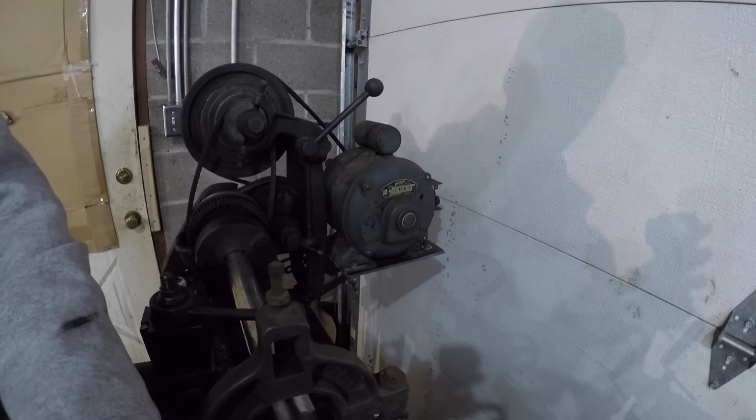This video is going to be on replacing the motor out of this Atlas lathe. That's the new motor I have mounted up. I'm going to go through the steps of how I figured out the math to the right pulley size, speeds, feeds, and what's not, and also show you the old motor that I took off and the basics behind how to change that out and get it going where you want it. So that's what we're going to cover today. Hope you guys like it.

In upcoming videos, we got our new project coming, the chainsaw mill. I'll be mounting a 4-stroke motor up to a frame, and this is going to be beneath it. I've got to machine some parts to mount this up, but all in all, we're hoping to have a 60-inch chainsaw mill with some homemade bushings and things to get it all working right. So yeah, that's what's coming up, that's what's on the agenda.

I got the lathe running, got the tailstock rebuilt, I have a video on that, also mounting up this new tool post, and just some general stuff about the lathe. But now that that's all taken care of, we can get into the real fun project. So hope you guys tune into that and enjoy it.

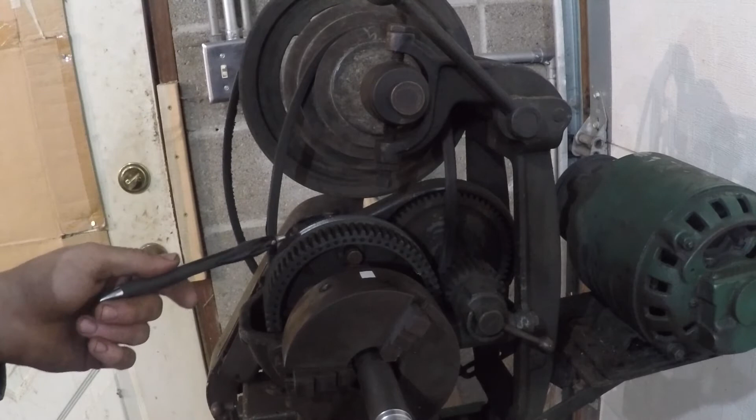My plan is to replace this old motor that died. It started losing power, slowing down, and I could play around with changing the brushes or whatever, but this motor is super old. The insulation on the wiring was cracking, and it's seen better days. So I got a couple other motors laying around, hopefully I can find one that will fit. But first I got to do a little bit of math, and I figured I'd show that because it might help people that are trying to figure out what speed for their lathe and whatnot, and surface feet versus the actual motor itself. Alright, let's go over and get started.

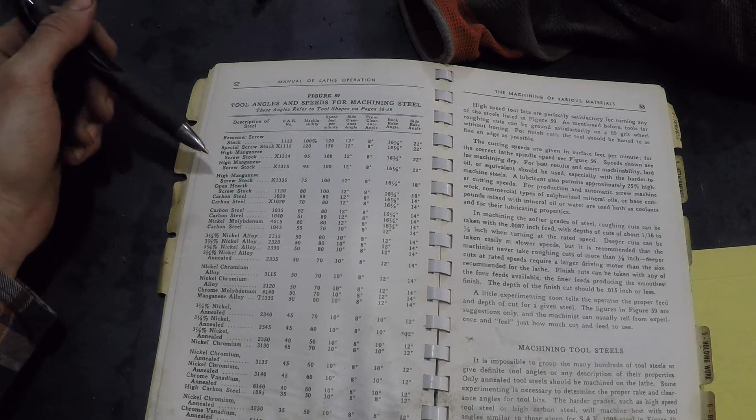Tool angles and speeds, which is pretty cool. Just regular carbon steel, 1020. I'm not really planning on machining a lot of that with this lathe right now, but anyway, carbon steel is probably more between 80 and 100 surface feet per minute.

So we'll say 100 just to make the math easier. Say we got a 1-inch diameter rod, and then pi times diameter is your circumference. So pi times diameter equals circumference: 1-inch diameter times pi, 3.1415, that's the circumference.

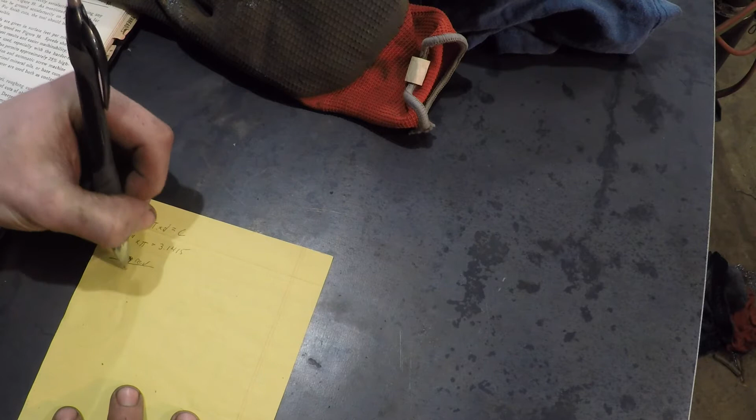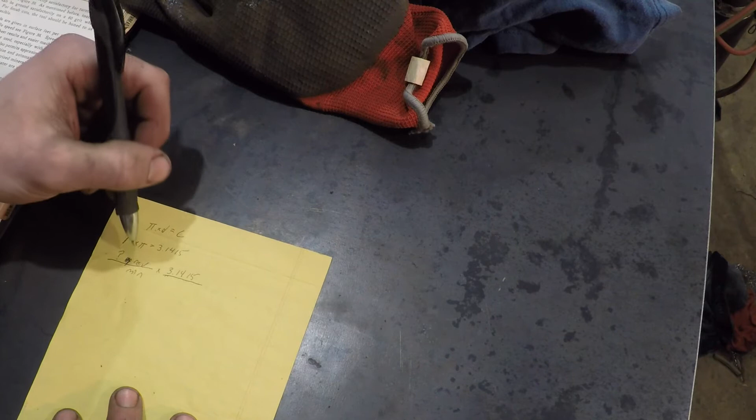Then we need to figure out what RPM, revolutions per minute, times that diameter, because this is each revolution. So 3.1415 - that's your circumference times your revolutions per minute, which will give you how many inches. We're in inches right now, inches per minute that it's spinning past that thing.

So if we're going to run, and we want this to equal 100 feet per minute - 100 feet per minute would be 1,200 inches per minute. So 1,200 inches per minute divided by 3.1415, we divided it by that, so now we are at 381.9 revolutions per minute, which will equal our target.

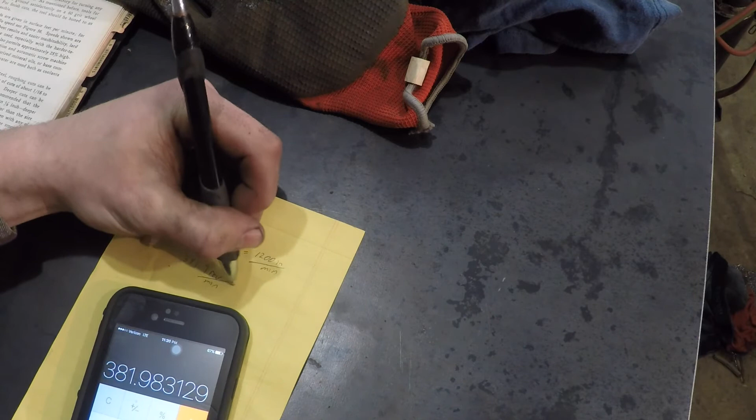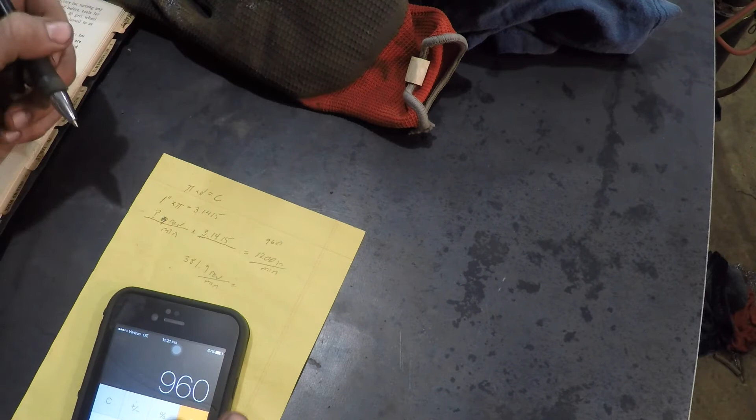So we need 381, and then for 80 feet per minute it would be 80 times 12, which would be 960, divided by 3.1415 - so 305 for... wait, 305.5 equals 80 feet per minute, versus 381 for 100 feet per minute. So we want that spindle spinning about

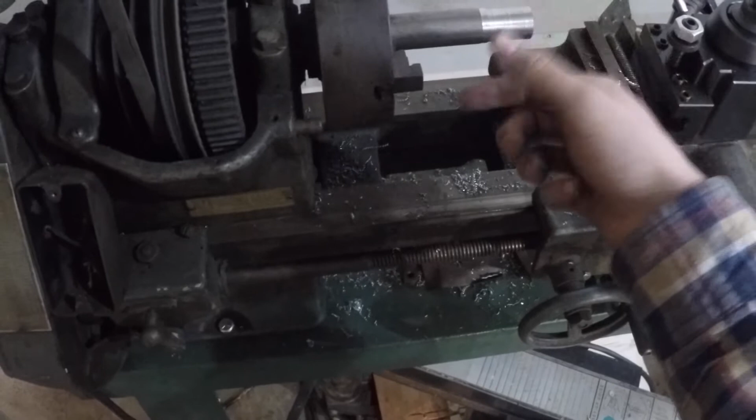300 to 400 RPM, and we're going to set it up so we've got 4 options here, so we're going to pick one of the middle options. That way we have some adjustability here, and we can go all the way up. As you increase that diameter, it's going to be spinning slower - well, if you have the same speed and increase the diameter, it will be spinning faster, but for an increased diameter you need to slow the spindle speed down.

So for 1 inch - I might be doing a little bit smaller than 1 inch, but I don't think I'll be milling a lot of stuff under 1 inch - so I'm going to set that as kind of the faster speed. If we were over here in this belt selection, for a faster speed we have a bigger pulley spinning a smaller one, so this would be a little bit faster.

So I'm going to set this up so 1 inch will run nicely at this speed, and if I need to, I can jump to this guy and increase the speed a little more, but I still have 2 selections for bigger material to slow things down. So I think that's kind of my plan.

We're going to measure these and see the ratio between them, and then pick a speed, hopefully I can find a motor that'll be spinning just about right. So let me grab a tape measure here.

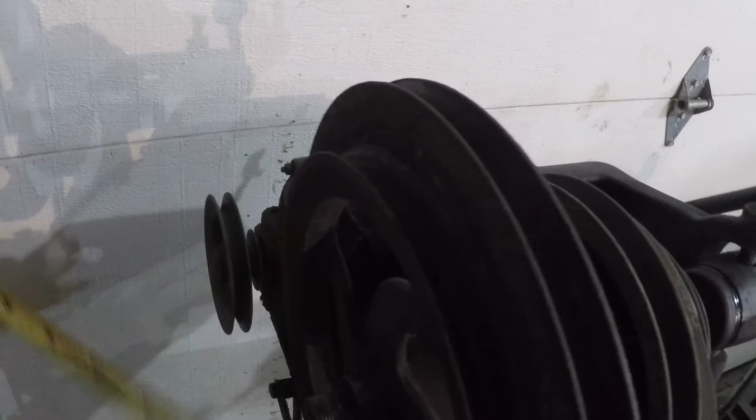Say 7.5 to about 4.5. Mark this down.

So on the motor we've got 4.5, 7.5, and then I'm going to measure the other two. And then we've got 2 inch and 9 1/4 inch.

Again, it's not going to be perfect, but this will get us in the ballpark. So we know this will be our faster speed here because it's jumping from a bigger one to almost slightly larger. This is a much larger gap, so this will be spinning a lot slower. So we're going to pick the faster speed that we're going to be running at, because this 1 inch is pretty small.

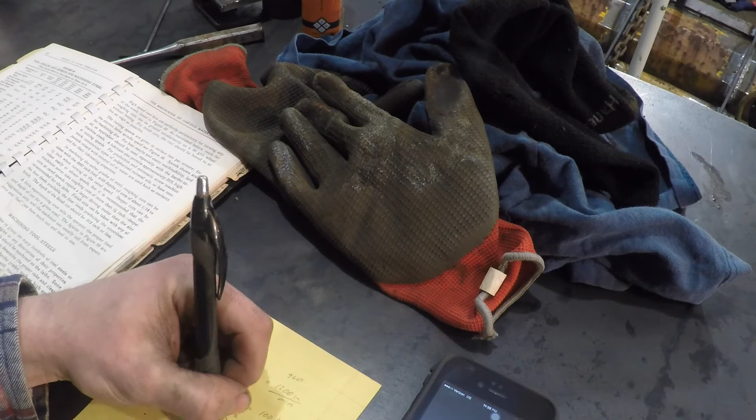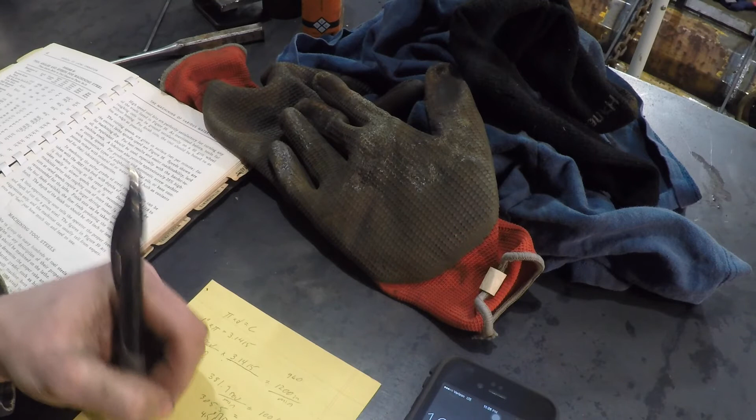So 9.25 divided by 2 is 4.625, that's the ratio on the first pulley. And then 7.5 divided by 4.5 equals 1.6 ratio.

Whatever speed you're having here is going to get stepped down once, and then after that, the same shaft will always spin at the same RPM, but your pulley size, so jumping from here to here doesn't matter. Your shaft's still spinning at the same speed, but as you go from here to here, there's going to be another speed change.

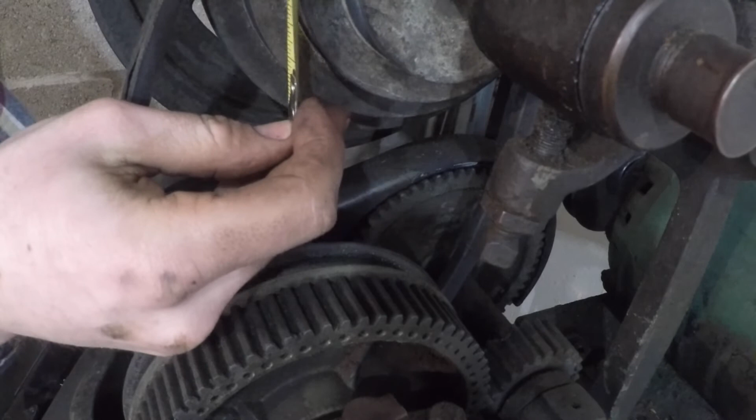So, and on these guys we've got a 3 inch, a 4, a 5, and a 6.

I'm going to assume these are the same, they look about the same. I can't really measure it, but I'm going to assume. I think they're about the same. That looks like a 6 inch, yeah, that looks like about 6. So we have a 3, 4, 5, 6.

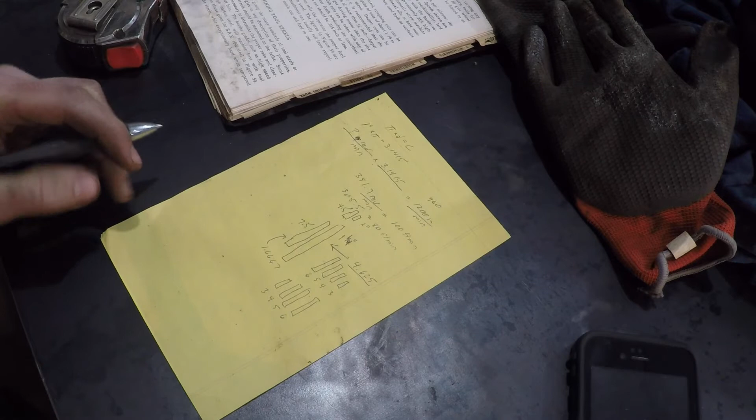So we get a little bit of a variable ratio there, that gives you a lot more speed control. After that we have 3, 4, 5, 6, and then on the bottom we have a 3, 4, 5, and 6. I guess for the drawing aspect, we'll put those all on a shaft together.

I know my handwriting's pretty shitty.

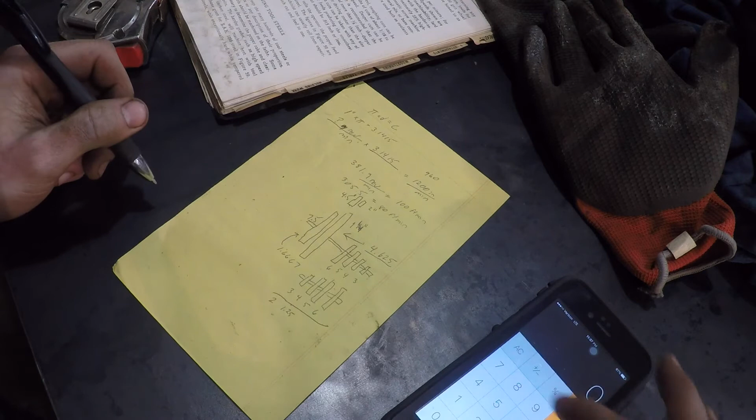So 6 divided by 3, we have a ratio of 2. 5 divided by 4 is 1.25. 4 divided by 5 is 0.8. And 3 divided by 6 is 0.5.

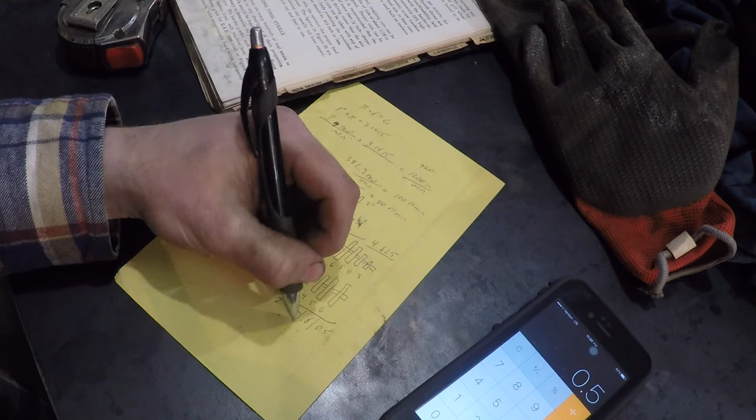So, in the position we're at, we are. So I got some junk, that's a radial arm saw and a wood lathe, they're going out of here. When I unloaded all these new tools, those have been in there, so those will be gone soon.

So we're going to be at the second position for 1-inch stock, like for our approximation that we're doing now. And hopefully this motor's in the ballpark, we might have to change some things, but this is just to figure out the right RPM of the motor, because that's the unknown at the moment.

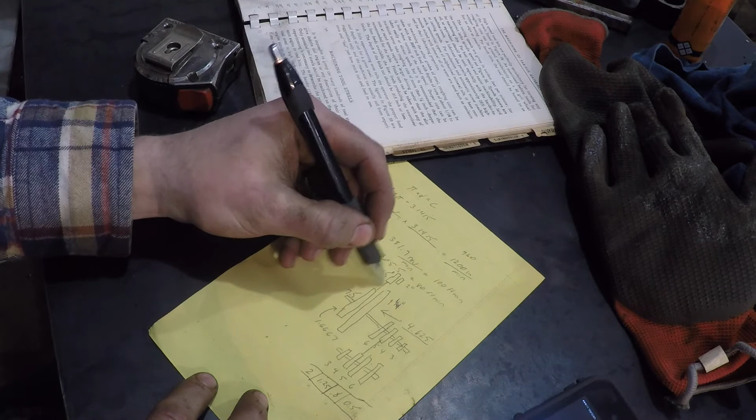So if we're in the second position, that means we are right here, and we're going to say that we are on the faster side here too. So whatever RPM of the motor, say it's, I think the motor I have is 1725 RPM, it's going to go through a 1.6 reduction. So that's that first one here, because we're on this guy, so a 1.6 reduction.

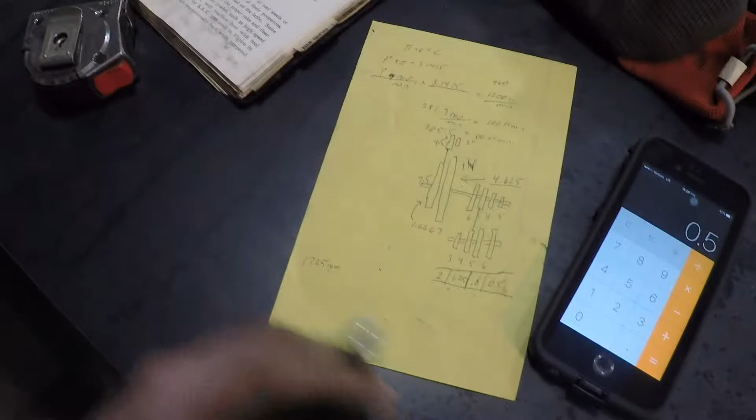So divided by 1.666. And then after this, it's going to be on the same shaft here, going from 5 to 4, so it will go from a larger pulley to a smaller pulley, so it'll go up by 1.25, so times by 1.25.

I might make an Excel with this in it, and then I could just easily throw in different values for the different options and run through this. I might do that later tonight, that way I can double check that my speed ranges are useful for multiple sizes of material.

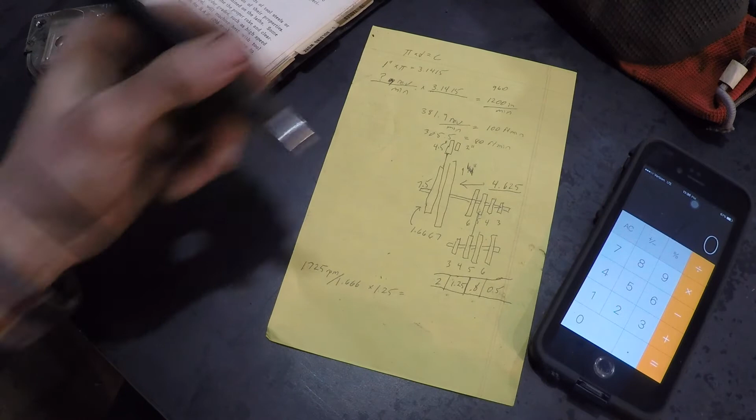But for the sake of having to do all the calculations, I'm going to ballpark it with this for now. So 1725 divided by 1.666 is 1,000, times 1.25. Because we're going to divide, wait, 1725 divided by 1.6666, yeah, so we get slower as we go from here to here, which makes sense. And then we should speed up slightly because we're going from a larger pulley to a smaller pulley, so times 1.25, so that equals 1,300.

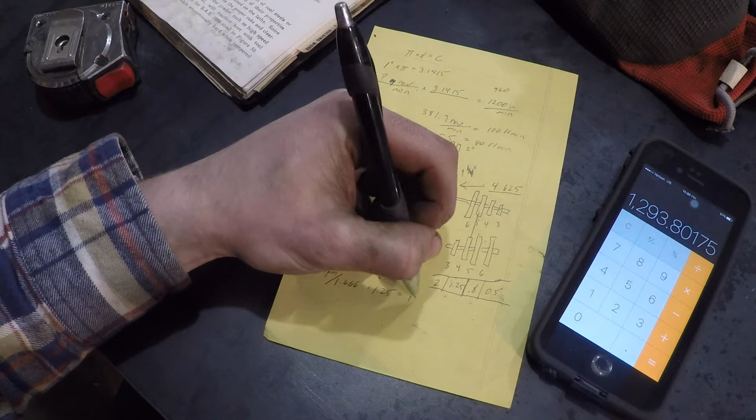1,300 RPM. And remember, our goal for a 1-inch piece at 100 feet per minute was 380, or for 80 it was 305. So we're kind of hauling ass. We're 3 times too fast.

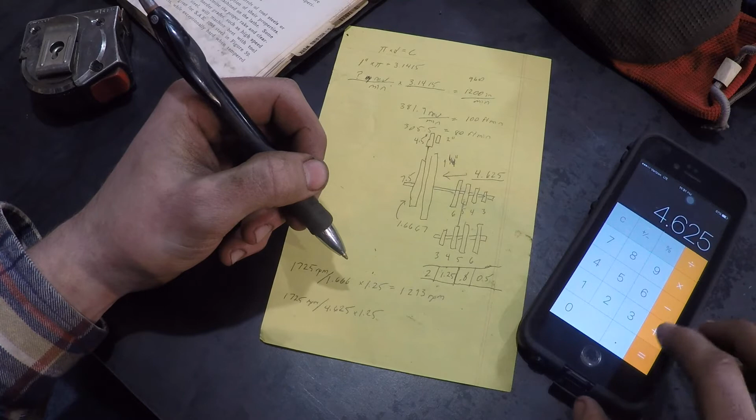Let's do one. Say we put it on the other one, the 2-inch to the 9 1/4, so 4.625. So 1725 RPM divided by 4.625, and then we're going to multiply again by 1.25. So 1725 divided by 4.625 is 372, times 1.25 gets us at 466 RPM, which is a little closer to our target.

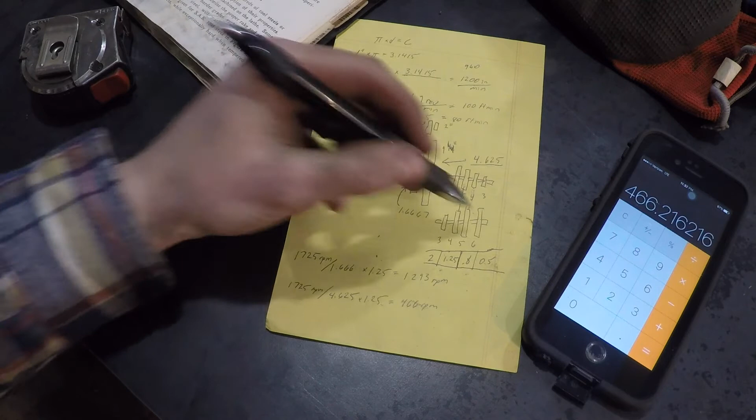And if we hop down to this ratio here, the 4 to 5 is 0.8, so then we would just substitute that in here. So 0.8 would take us to 1725 divided by 4.625, times 0.8, we're at 298.37 RPM. That right there is a little more doable, a little better in our speed range.

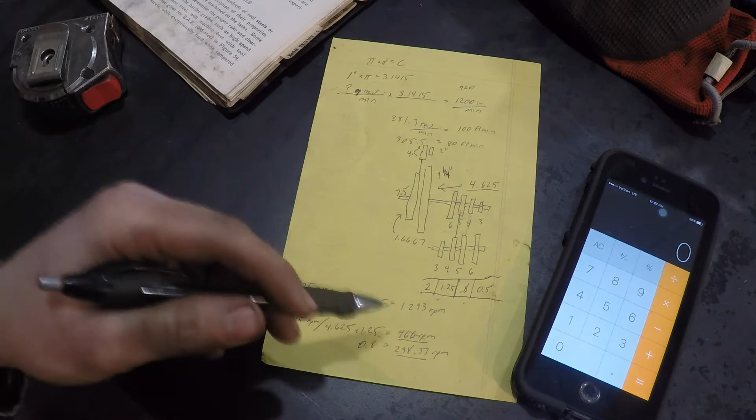So I guess let's just do this. We'll figure out if we're on this 2 to 9 1/4 pulley, we'll figure out all 4 of these and see if that's a reasonable range. Because I also have some carbide tooling. I don't know right off the top of my head what speed, but I know you can run carbide a little faster, so it might actually be okay.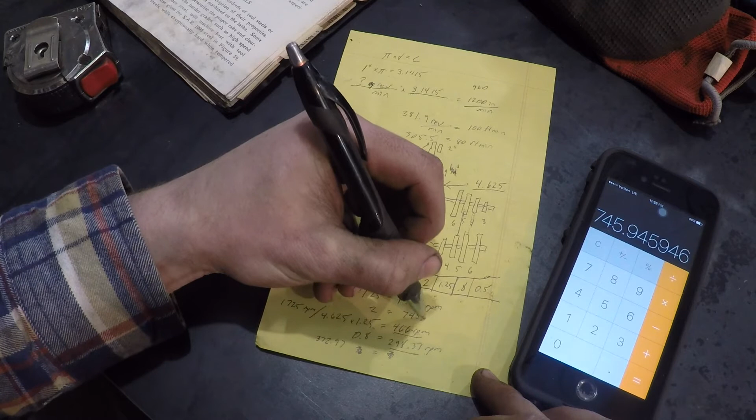So 1725 divided by 4.625, this number is going to stay 372.97. And then we're going to times that by 2 for this pulley here. 700 - I'm going to put this up here so we don't get confused - equals 745.9 RPM. And then our last ratio is 1/2, so 372.97 times 0.5 is 186.485 RPM. So for these 4 ratios here: 745, 466, 298, 186.

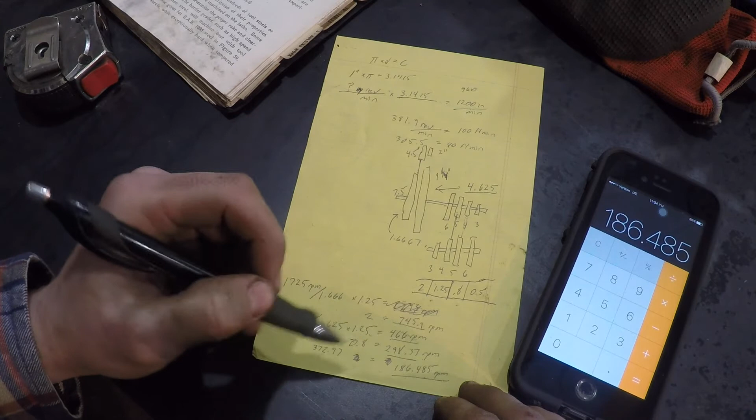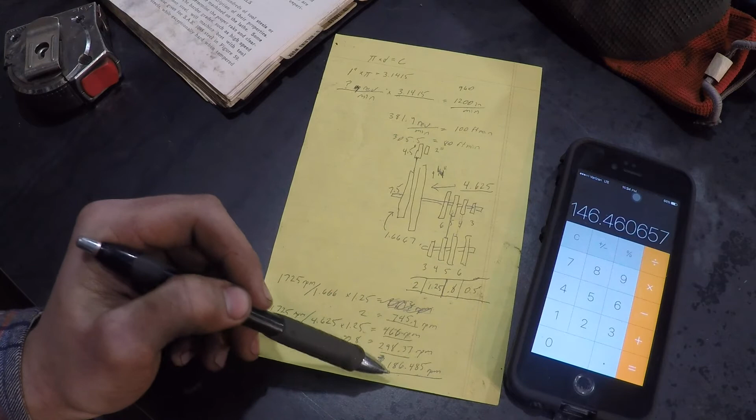That's okay for - let's see how big of a piece we could put on here and still be all right. Say we have a 3-inch piece times pi, 3.1415, so pi times diameter equals our circumference, times our RPM, say we're at the slower speed, times 186.485. That's going to be in inches per minute, divided by 12. So we're still at 146. That's a little too fast on the slowest setting for a 3-inch piece. So that would be on this setting here and on this pulley here. So our lowest we could go with a 3-inch piece would be 150 feet per minute. And you can divide by 12 in that calculation because nothing's squared.

So if you have anything squared in a calculation, you have to apply that factor twice. This stuff here is called dimensional analysis. It's useful for tons of things - pulley calculations, chemistry, lots of different things. That's where I learned it at.

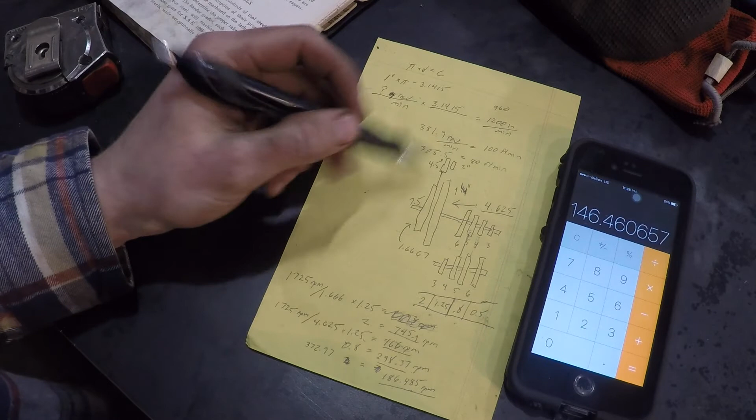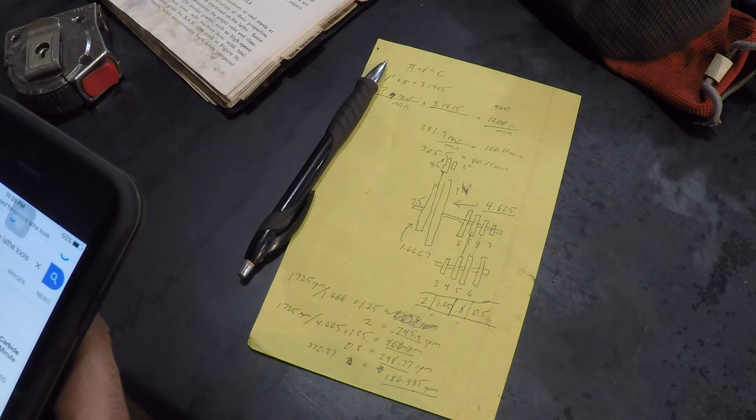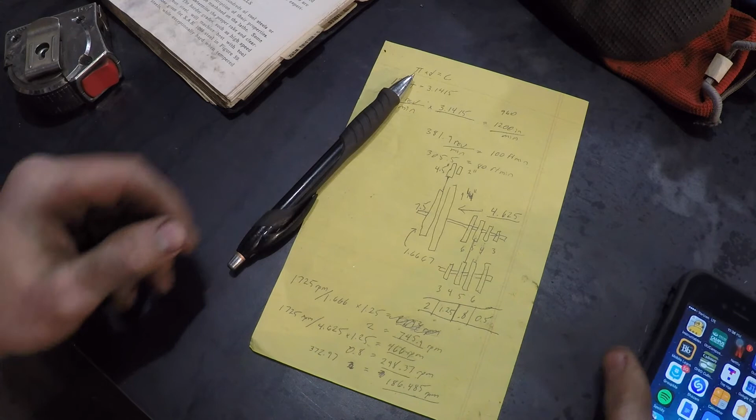So anyways, for a 3-inch piece, 146 is still a little fast. For carbide, it's probably okay. Actually, I'm going to look that up while we're sitting here. Cutting speed, carbide, lathe tools. So for free machining of plain carbon steels, that's 950 feet per minute, which is very doable on this now. It's anywhere from 600 to 1,000 it looks like, just off a little quick glance. It's probably different for specific tooling, but yeah, I think that'll be okay, because like I said, we're still running slow enough on the slowest setting.

We're at 150, which is a little bit fast for regular high-speed steel, but it should be okay - I don't know if I'm going to be doing 3-inch stuff that often anyways. So I think with this setup we'll be okay with this 1725 motor. So let's go get that motor.

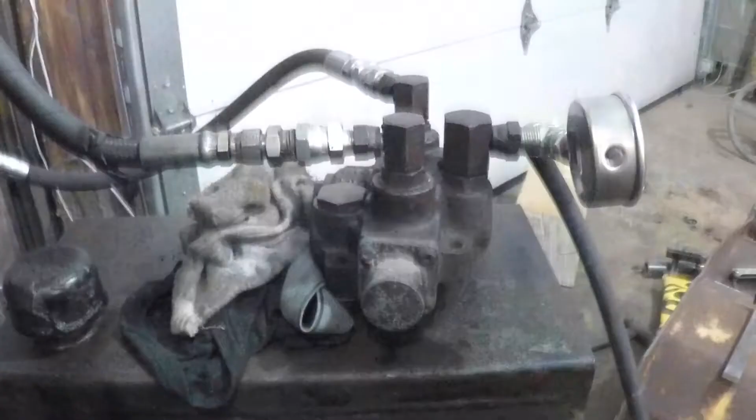So this was a project I'm working on too. I got this hydraulic pump, and I hooked it up - it's actually a dump truck reservoir and valve body - and then I fabricated this little cart here, and I was going to use it as like a little mobile hydraulic unit for the shop, for the tube bender and stuff. But that motor's a little underpowered anyways. I think it's only 3/4 horse, so I won't feel bad if I pull that motor off of there and put on something else.

So here's this little pump. This is still in the mock-up stage. This guy's not even mounted - I was just holding it with a vice grip while I was testing this out. I haven't even finished welding all this or bolting it all together. So yeah, I don't feel bad stealing this motor. I might look at another one too. So let's look at the speed on that guy.

Yeah, and I got another project here. It's a flail mower I'm working on, getting it hooked up to run on the skid loader.

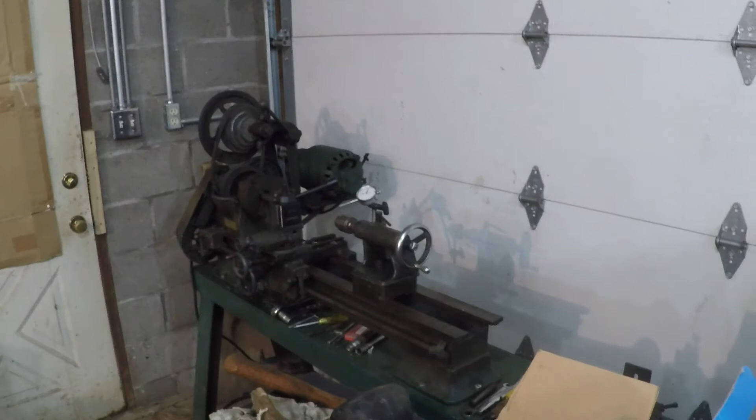I got a little bit of project ADD. So, RPM 1725, and it's a 3/4 horse, which I don't know the horsepower calculation for lathe tooling, but that motor over there is very old and not very big, so I'd guess it's about half a horse. I don't think there's a nameplate on it, but I think we'd be all right with something about 3/4 of a horsepower. So let me look through my old motors over here and see if I can find something.

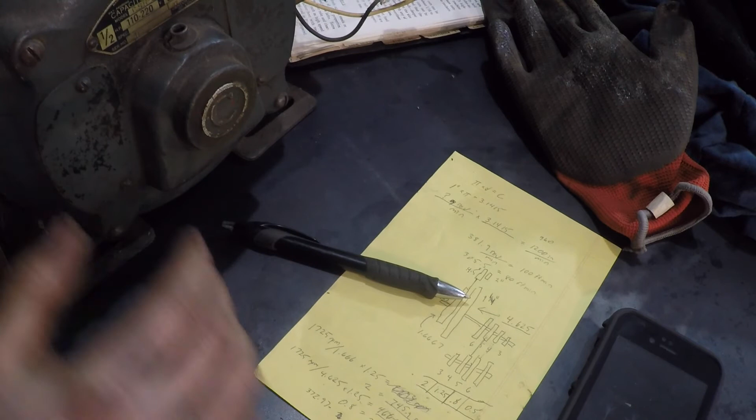So I got two that are 3450. I don't know what this came off of, but this guy is a 1750, so slightly faster than what we calculated for. But this one should work if it works. It's only half a horse despite its size. It's an old capacitor motor.

Just taking a look at this thing. There's a little bit of play, but that's kind of normal front to back. But up and down, bearings feel pretty solid. It rolls nice, not hearing a lot of grinding or anything.

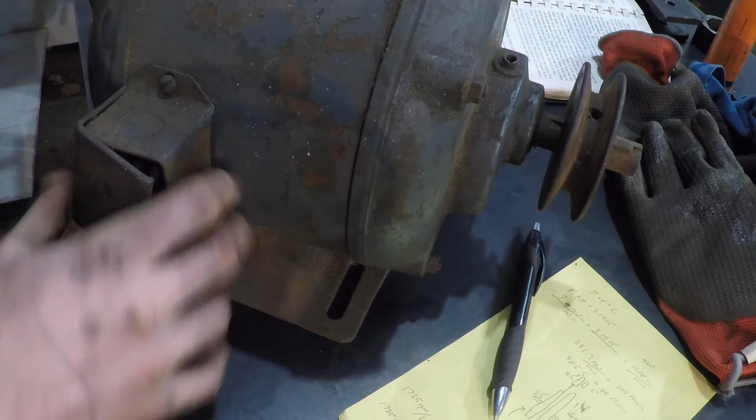Yeah, I think this might be our ticket here. If we're lucky, the frame size—most of these are industry standard. I don't know how old this is, so it might not be, but hopefully the frame size is similar too. Let's give this guy a test, see if it works.

And this thing can run on, it says, 110 or 220. We'll just run on 110 because my 220 is over there—I'd have to run another 220 plug over here, and I don't really feel like doing that right now for this. But this wire's a little bit janky. I might work on that, but let's just test this guy first.

This isn't the best way to do this, but it's quick, just to see if it works, see if it's out of balance or anything. Don't do this at home.

So the small end of the plug is always your hot side. Wow, the thing actually runs very quiet, quieter than expected. Very little—a little bit of vibration, a tiny bit, but not much.

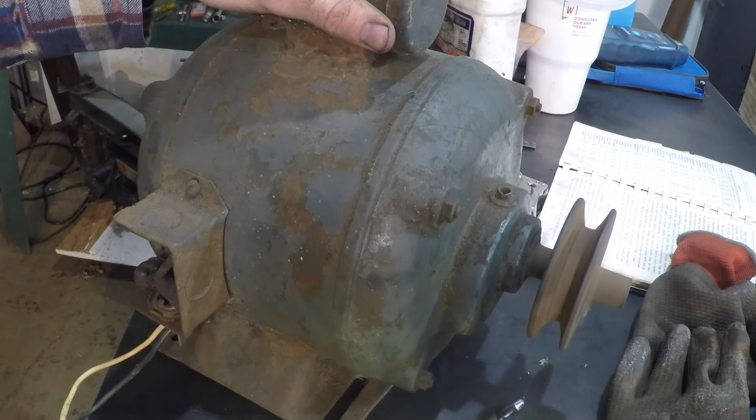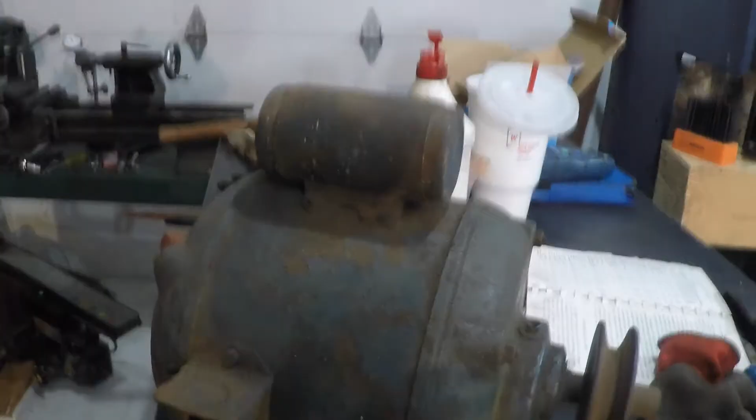Yeah, I think that might be the ticket there. Again, it's only half a horse, so I might need something with a little more oomph behind it. But that motor over there, very old, and it is not in good shape, and it was turning. I'm not— again, this is just kind of a hobby thing. I don't have anything crazy running in here, so I don't think that it'll be too much of a problem.

So yeah, let's get this thing—I'm gonna pull the old motor off, and then we'll come back to it. I'm gonna measure the plate. I might have to fabricate a plate and make a new mounting plate and stuff. Also, I need to check the shaft size. If I'm lucky, it'll be the same shaft. Probably not, but I might be able to run it on this pulley for now with just one size. But we'll see.

Alright, so these in comparison—this one's substantially bigger, but it's also way bigger than a lot of the newer motors I have, and it's still only half a horsepower, so I'm not really sure size is a fair comparison.

Yeah, this guy was pretty old and pretty rough. I just hooked it up with a quick little— this isn't even grounded, this was just a quickie to see if I can get this lathe on and running. But now that this one died, let's switch these out.

I didn't get lucky on the pulleys. This one's— oh wow, there's quite a bit of slop. That key's loose, or the set screw's loose. But yeah, I didn't get lucky on the pulleys. This one's a 3/4 inch, this is like a half or something, so it's a lot smaller. But this pulley will speed things up a little bit.

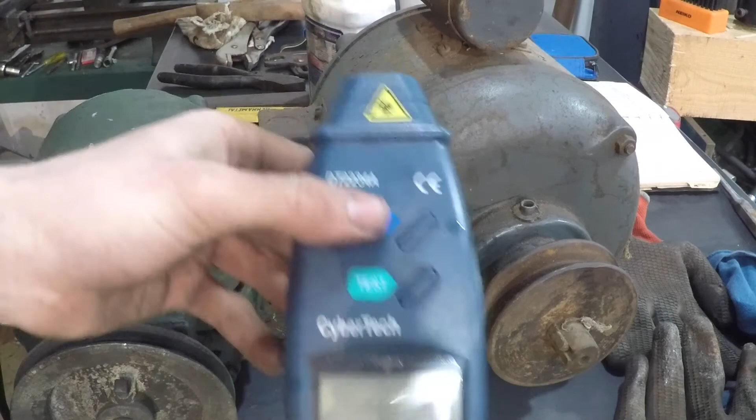But I think for now it'll work. If it's not, I'll redo the math and test it. I have the laser tachometer, so I'll shoot it and see what it's looking like. But worst case scenario, I just got to get another smaller pulley. And also that V-groove pulley might be a little too big too, but that's easy enough—pick up a new pulley. So, all right, let's first things first, get rid of this power cord that was on here.

And then this guy's probably going to end up, well, I'll pull out this actually.

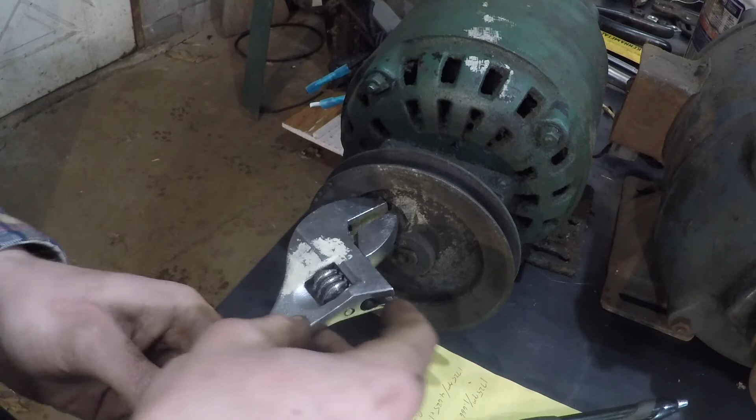Got our farmer wrench here. Hey, maybe I'll throw this on the lathe and turn it out. No, probably not, but... Alright, this guy's probably going to the scrap bin. Did good, but it's seen its day.

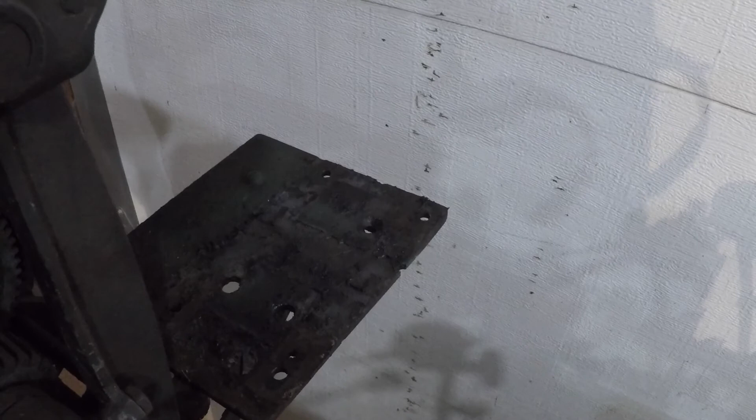First things first. This has definitely had some other motors mounted here. You can tell there's a lot of holes been drilled in this over the years. A lot of weird hardware as well, and that one's missing one, and yeah.

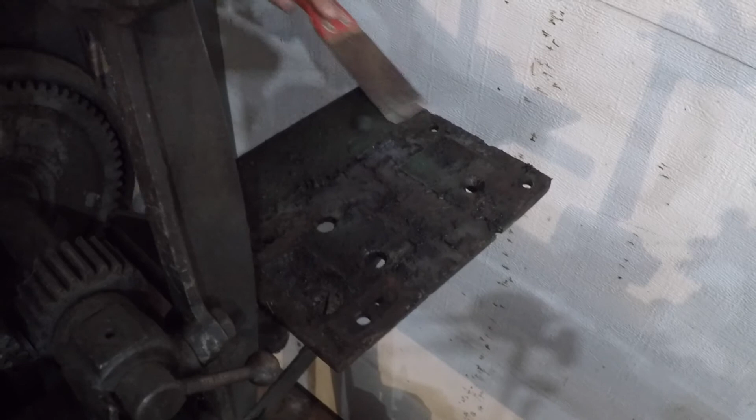So let's dry them off here. Okay, take this off.

That's weird. Looks like these are actually brass. Huh, strange. Alright, we got that cleaned off enough.

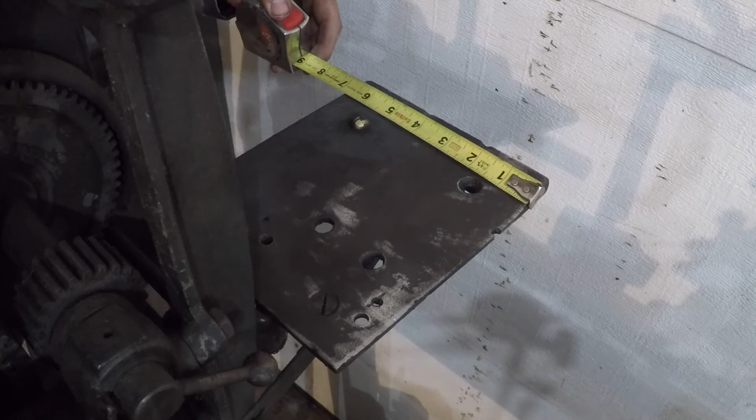That mounting plate's quite big. It's actually 6.5, so yeah, that's going to sit right on here. That's going to interfere with those brass fittings. Yeah, we're going to have to take this guy off.

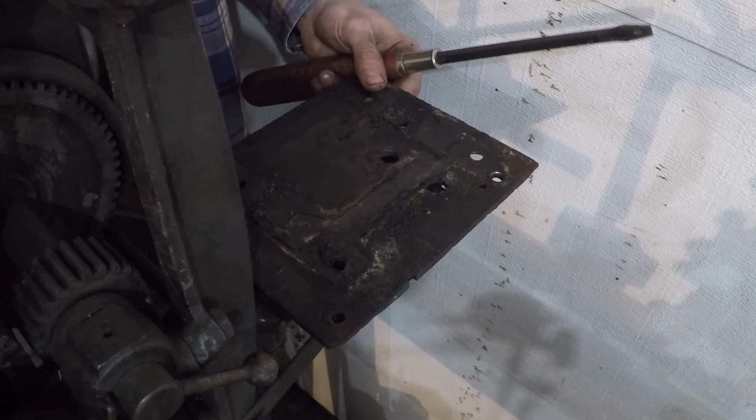Now, this plate's been pretty thoroughly drilled and messed with. I think I might make a new one. Yeah, that guy's clearly been homemade, and it's been drilled, and a whole lot happened to that. So I think I'll just make a new one. That way I can get it mounted up just the way I want it.

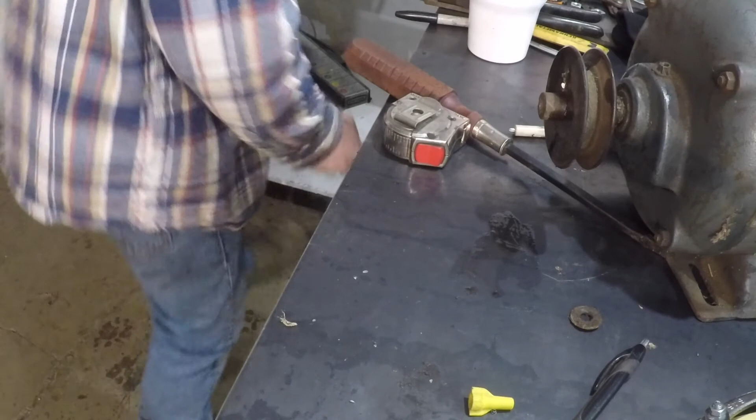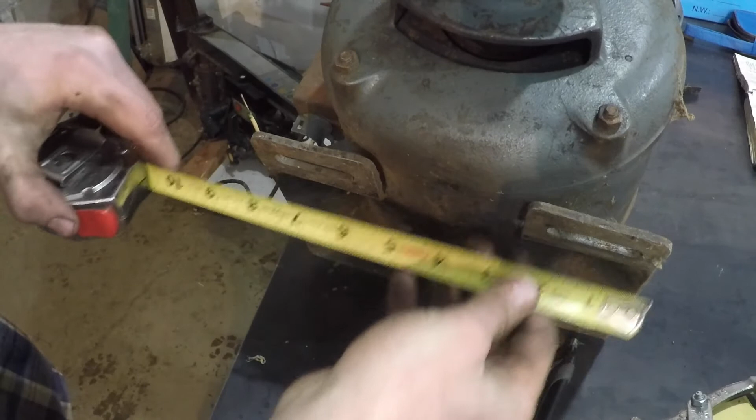So the deck it's going to sit on is 5.5. This motor here, this guy's 8.5 wide and 6.5. Just a little shy of 6.5. So we got 8.5, 6.5 on that.

And then over here we got 5.5 by 6, 6.5. Yeah. So, yeah, we're gonna have to go quite a bit larger than that one.

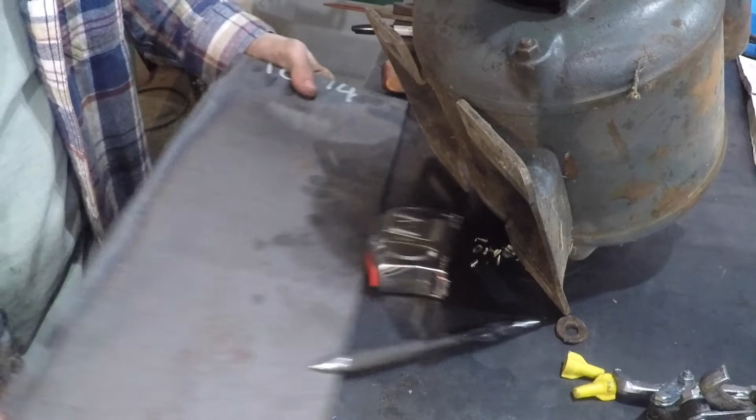And I got an abrasive cutoff, and I got a table saw or a vertical bandsaw, but the bandsaw has been having some trouble, and I don't have the guide quite figured out yet, so it still cuts a little crooked. And this is a little bit thick for the chop saw. I have to cut it twice, and it's kind of hard to even up. So, and this has already been torch cut once. I might just torch cut it again, and then I'll even everything up with the grinder. And it's not entirely crucial, you know, this isn't a machine part or anything.

Okay, so we got 3/8 bolts that are going in there. This thing has to be able to slide, and I want a little bit of room on these because they're not exact, so I'm drilling a 7/16 hole in the plate.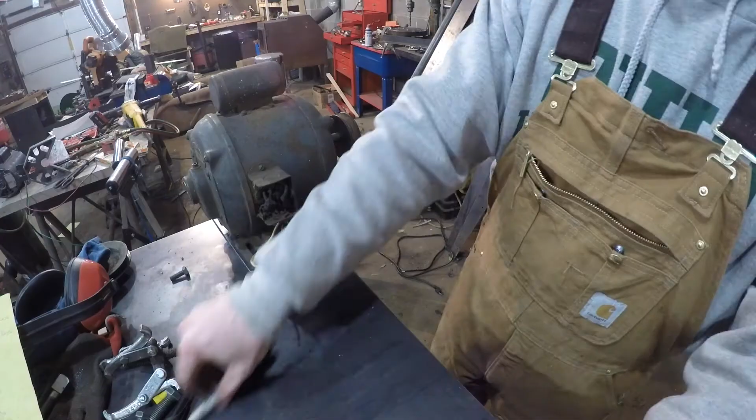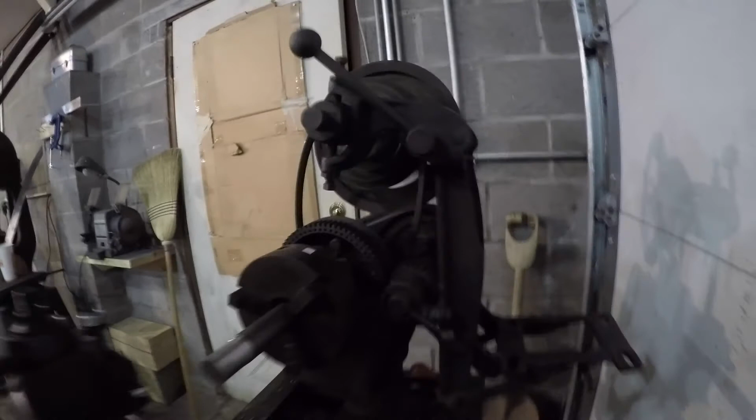Alright guys, so I've got a quick plate made up here. Motor fits nicely. Now, all we got to do is got the plate cut, drilled and everything. Fits nicely. Now we just got to go over, lay it out on the lathe itself, and then we can check out kind of how this is going to all come together.

So I think what we'll do actually is we got one mounting hole here. It's kind of going to be hard to see, but this mounting hole here is the same hole for the plate to sit on the lathe. So I think we'll actually match that one up. Over here, this one hangs off. And then this guy over here also hangs off. And so does this guy. So we can mount those.

That'll give you a little better view. But this one here, and that one there will all mount separately. We'll just thread this plate, thread it, bolt into there, and then this guy will share this hole here. And that gives our belt. My belt has to run slightly angled out, but also I think I got to get a smaller pulley for that too. But it'll run a little bit of an angle, but it'll be able to handle that.

And then we can also run this off with just one pulley for now, until I get a 2-step pulley there. Yeah, I think that ought to work.

Alright guys, so I'm over here tapping this plate, got it cut out, and got the holes marked on the lathe. And I was just going to make a quick note about tapping holes.

Because like anybody else, first, you know, when I was first learning how to tap holes, I kind of struggled with getting straight holes tapped.

And I used to just go find drill bits that I thought were the right size and drill the hole and then tap it. And I broke taps and all sorts of stuff. Didn't know what I was doing.

But kind of over the years I've learned the best thing to do is get yourself one of these charts. Helps you for thread identification of pitches and different threads.

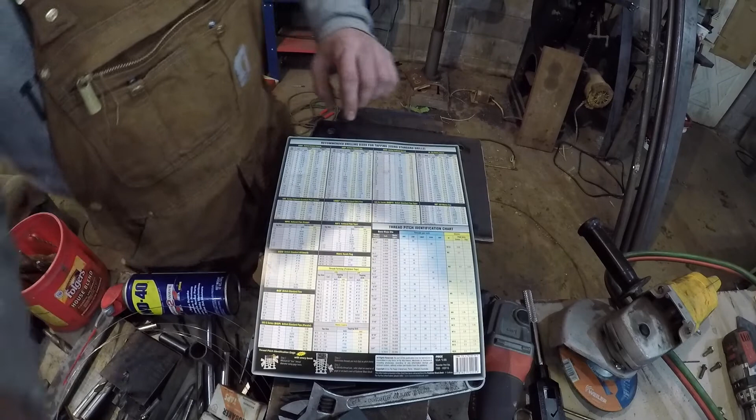And also, if you look at it, we've got, here, I'll bring this up. You've got, like we're working with coarse thread right now.

So it tells you your tap size, threads per inch, what size drill to drill the hole to tap it, and then also a clearance drill of what size will allow you to pass the bolt through.

So make sure, because this really helps, because you know you got the right drill bit, you know you got the right size hole. And then also a note on taps.

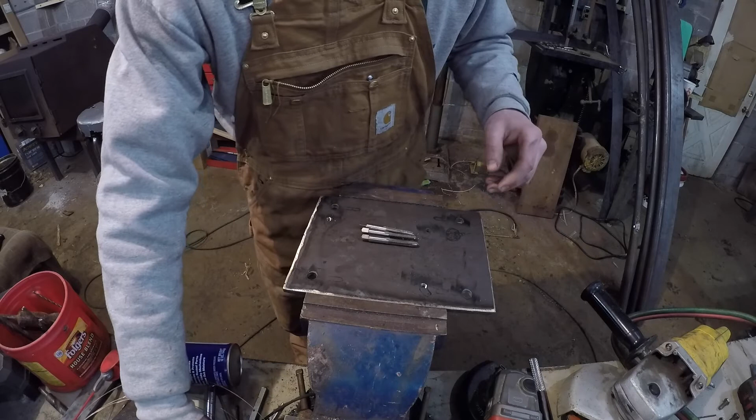I've got some old taps that were my grandfather's, and like any other high-speed steel tap, these are just a huge improvement over the cheap big box store taps that are just carbon steel.

They break, they don't cut threads well, they really struggle, and it's just honestly not worth it. I mean, it's like anything else, you put the money in, and whatever you pay is what you're going to get. So definitely get yourself some good taps.

And then also the different kinds of taps. So starting taps have blunted threads on the first several, like 6 or 7, and then I don't know what the middle tap is called, but there's only blunted threads on like the first 3.

And then you have bottoming taps that are threaded all the way, full size threads all the way through, and they only have like 1 or 2 half threads.

So when you start a hole, you want to start off with the one that has the most blunted threads coming up. That way it kind of helps self-center in the hole. And if you tried to start with a bottoming tap, you'd probably just break the tap off, or you wouldn't start it, or it'd be crooked.

So yeah, knowing what you're getting is important, and also a little bit of attention to detail when you're actually using it.

So there's lots of different ways. There's tools you can set on the surface that center your tap. I don't really have one, but there's lots of different things you can do to help.

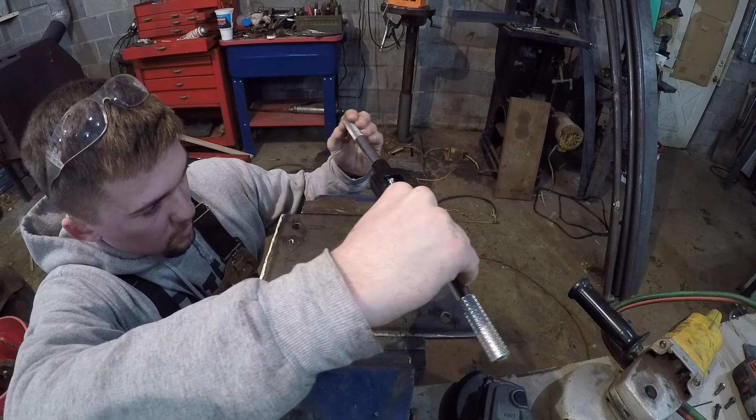And you have to apply a little bit of downward pressure as you do it. Make sure you're at 90. Come over here. Again, we're applying downward pressure and we're keeping an eye on the tap.

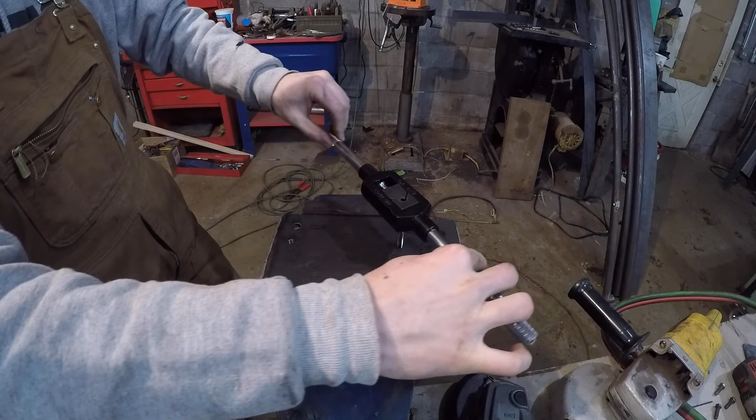And just keep making minor adjustments, because right as you're first starting, you can minorly adjust what you're doing. Once you get a little ways in, the tap is set. The other thing too is watch out with how much pressure you feel building up on the tap, because especially with a tap wrench like this, you can easily break a tap off if you apply too much pressure. So we're coming in, we're keeping an eye on that tap, just going real slow, checking both directions, making sure that we're still square.

And for longer holes, it's better to set up a jig or use a drill press to center your tap for you using a spring-loaded punch. There's lots of other methods, but for shallow holes in a plate like this, we should be able to get by with just eyeballing it. Again, just paying attention to where that's at.

And now that we've kind of got going, we're starting to get to the point where it's set. And that's when I usually add a little bit of cutting fluid. I don't have a specific like Tap Magic or anything right now, but some WD-40 works fine. And when you start cutting, you'll feel pressure build up, and then you want to back off. That breaks the chip, and then you continue moving forward, breaking the chip every so often, and you just work that tap through the hole.

And these nice high-speed steel taps are just light years better than a cheap regular carbon steel tap. They last a lot longer, they cut a lot easier, and you'll really thank yourself, because I spent a long time with crappy taps before I discovered all of my grandpa's tooling that he bequeathed to me when he passed away.

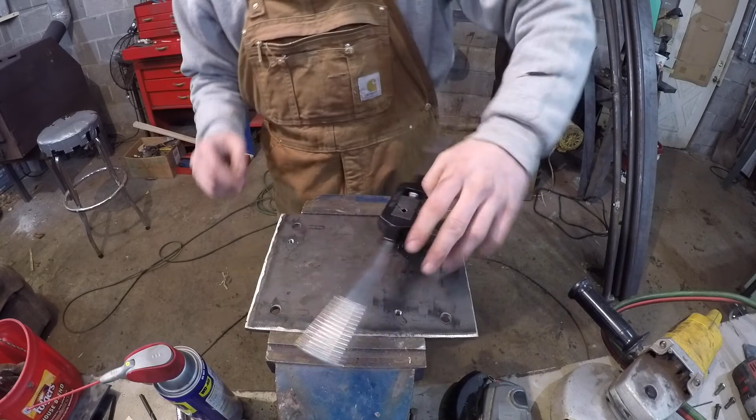Now that we're through, just work it down a little bit, and then should be able to just back this out with our fingers. Then we're going to cut back over here to our tap box. A little bit of something right there.

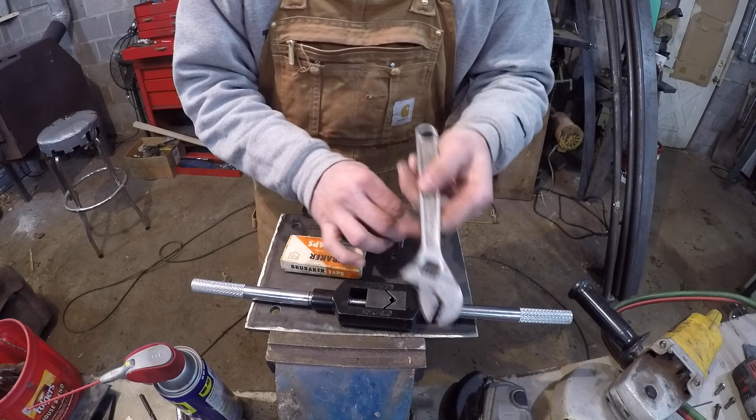Probably your biggest mistake is starting with a crescent wrench, because it is really hard to distribute force evenly with the crescent wrench, and you'll get really wonky holes when you try to use the crescent wrench. So I spent a lot of time doing that as well.

And we're going to look in our tap box. We're going to get our bottoming tap now. It's threaded the full length, so you can see it's got full-size threads all the way down. And we're just going to follow that first tap up, putting a little bit of cutting fluid on it. Get it started, put our tap wrench on, we're just working this guy through.

Once we almost get out, just finish it off by hand. So now we got that done. Take one of our bolts, got that guy in. If you take a look at that, it is nice and straight. So we're threading in real nice and straight. Threads are nice.

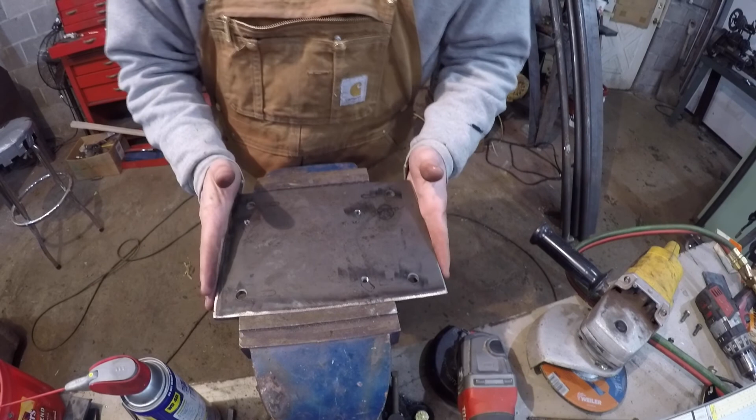So it's really not too hard to tap holes by hand, especially for little plate mounts like this. You just got to be careful and proceed slowly, and you'll end up with good results. So, alright, I'm going to take this guy, get this mounted on the lathe, and then get the motor on, and then we'll see if we can get the old lathe running.

Alright guys, so we're back over here on the lathe. Got the new motor mounted, and the original calculations I did were using a 2-inch pulley off of the motor, and this pulley over here that we got right now is a 3.5-inch pulley. So it speeded everything up a little bit, but we're still kind of in our range here.

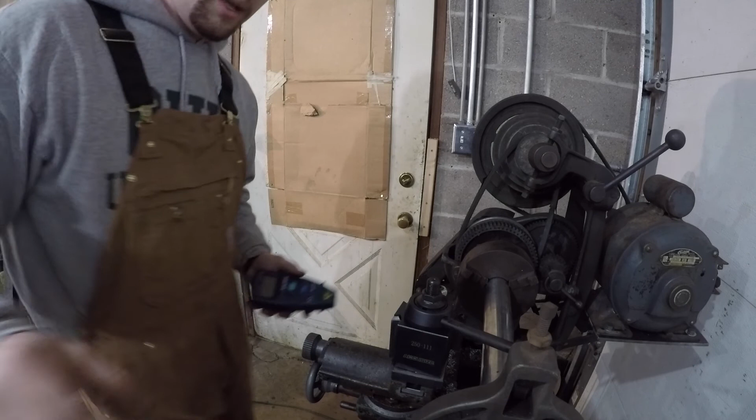If you look at, I got the digital tachometer here, so at our lowest speed setting, we'll shoot this guy. So we're at 245 RPM. So it's a little faster than I'd like. I was shooting for more like 100 on the slowest setting, but I think it'll be okay for now.

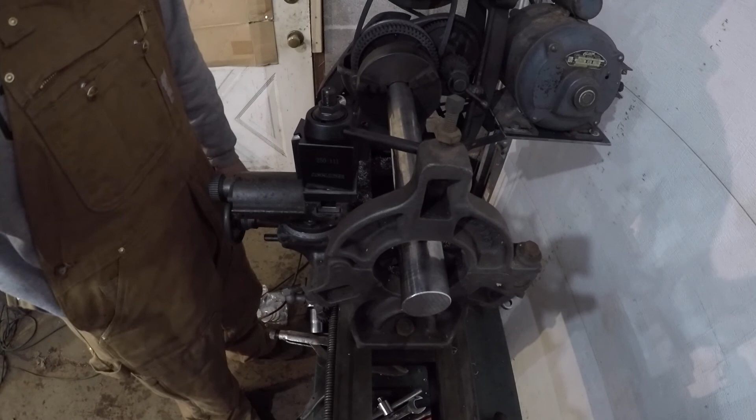I'm gonna buy a smaller pulley so that way I can go a little bit slower. But for now, for smaller stock, it'll work all right. And yeah, pretty happy with that. Got it all ready to go. I got a piece of stainless chucked up here. I got to get the steady rest set and get it adjusted and put in there correctly. But yeah, I'm gonna start on the new project with the chainsaw mill.